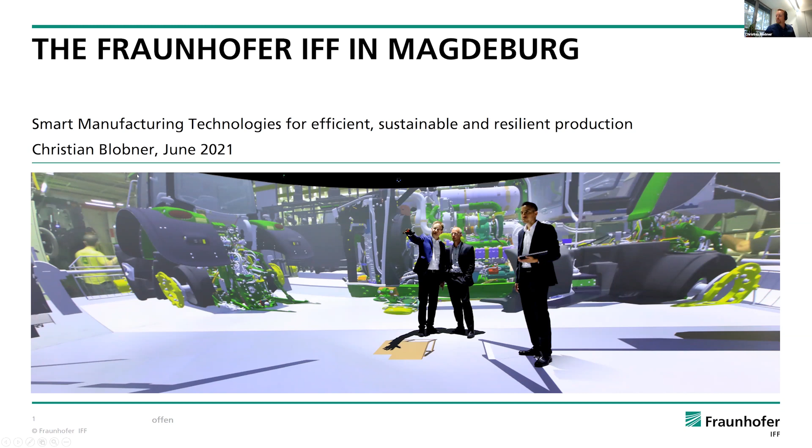And show you how research is performed in the city of Magdeburg, how research players interact and collaborate. So let's get directly into the presentation. Just to give you an impression of how we are situated here, we actually have two full research buildings in Magdeburg, which are pretty close to the University of Magdeburg. So there's also a very close cooperation between the research players here in Magdeburg.

Fraunhofer is very associated with the university. Our director, Professor Arlinghaus, has a chair for engineering at the university. And also we recruit our staff, our student assistants, from the university, so that there's a good collaboration between the basic research that happens at the university and the applied research for which Fraunhofer stands.

In our two research buildings, we have more than 4,000 square meters of laboratory space. We also have shared laboratory space with the university here in Magdeburg, but also with the University of Applied Sciences. So also staff from our side have different professorships at the university and the University of Applied Science here in Magdeburg. All in all, we are a very interdisciplinary bunch of researchers, with approximately 190 researchers here in Magdeburg, plus student assistants, plus collaborative partners.

And we work with an annual budget of about 20 to 21 million euros research budget, of which one third, according to the Fraunhofer model, comes directly from cooperating with companies, doing applied research to the benefit of the company, working on the competitive edge of companies to promote especially digitalization and automation within the region of Saxony-Anhalt, within Magdeburg.

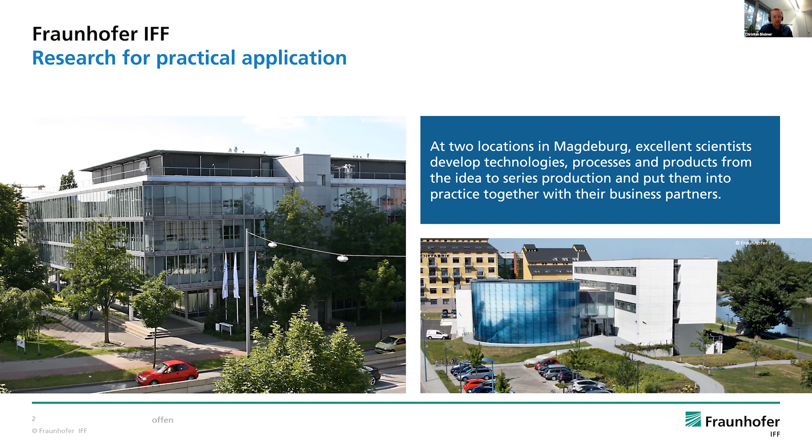Then from a technology point of view, we work very heavily in technologies around measurement and testing technologies and digital assistance, meaning how can we use optical measurement technologies to improve process quality, but also product quality, and use the data that we collect through these different methodologies and provide value-added data through digital assistance systems to the workers, to the operators within the system or within the factory.

The second more technical area is robotics and autonomous systems. Here we have a very strong focus on topics around human-robot collaboration, but also service robotics, and basically try to work on these topics on how there can be shared workspaces between robots and humans in the factory.

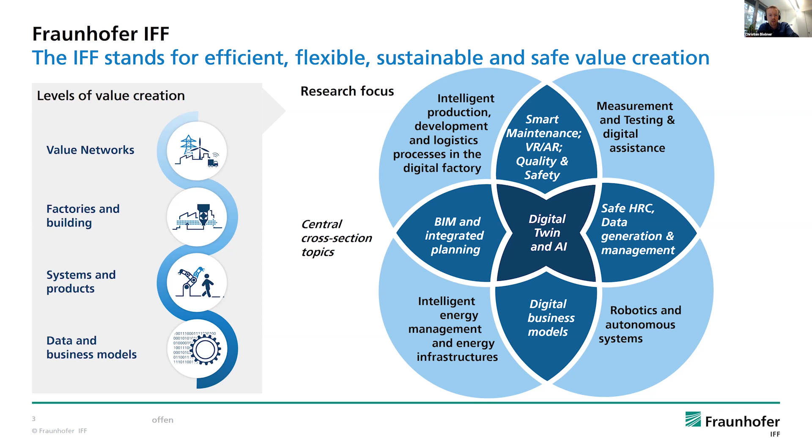I just want to give you a short overview of a selection of projects.

Obviously, we have multiple projects running through the year, funded through research funding projects from government agencies or the European Commission, but we also work on company projects, multiple company projects, and what you can see here is just a selection of those.

First, I want to give you an impression of how we use the digital twin of a machine, meaning the digital representation of this production system, and enhance it with the data that we can collect in real operation, and provide the worker, the operator of the system, with value-added information.

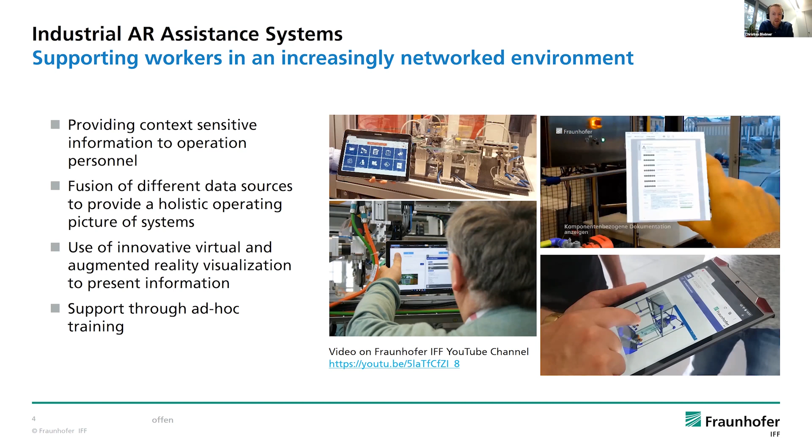Another project which I wanted to show you is again the combination of VR and IoT, but here on a much larger scale. And this is also a very nice example of how we cooperate with partners here in the region, because we have a very good project running, funded by the European Commission, on the digitalization of the port of Magdeburg.

Magdeburg has the largest inland port in central Germany, and we help them through the combination of IoT technology on the ground and VR models, and their combination, to optimize the processes in the port and increase the overall efficiency of logistics services and logistics processes in the port. Magdeburg and the region around it is a very important logistics hub in Germany, and cooperation with the logistics industry is a very important aspect of the work that we perform here at Fraunhofer IFF.

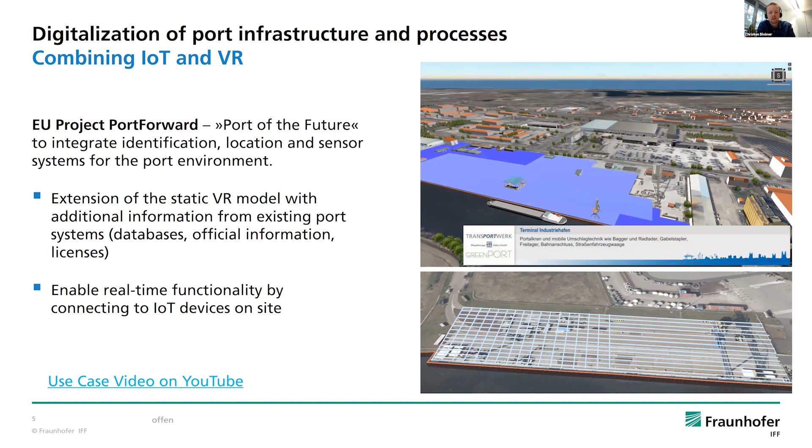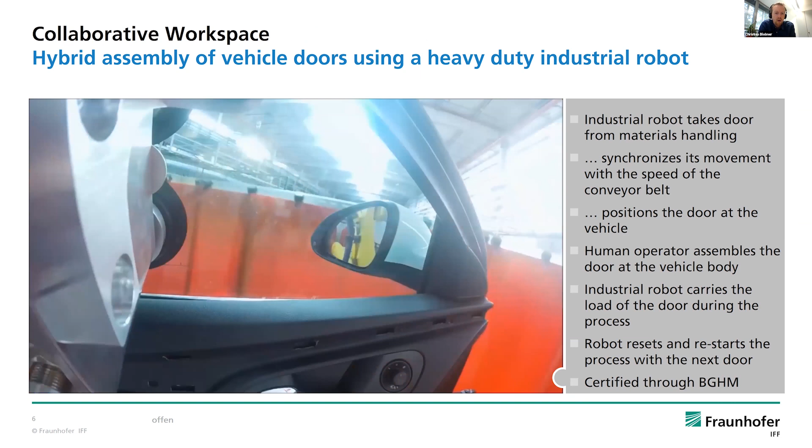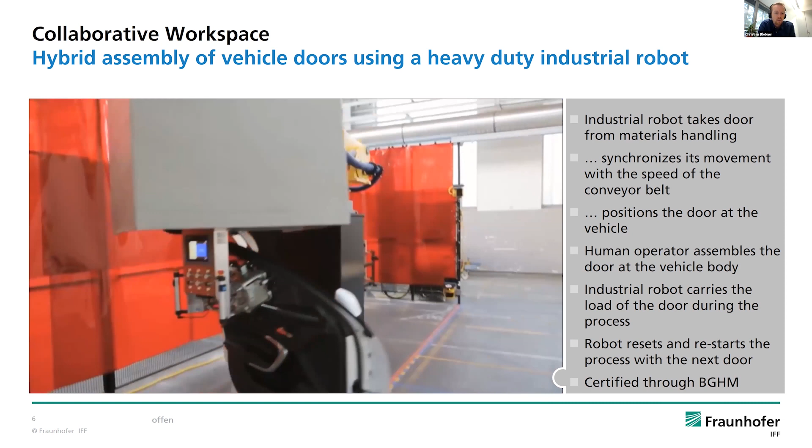But obviously, we also work with manufacturing companies. Here's an example where we work together with one of the big OEM companies from the automotive sector, Opel, on designing a shared human-robot workspace, where a big industrial robot is used to position, for example, doors in the manufacturing assembly process.

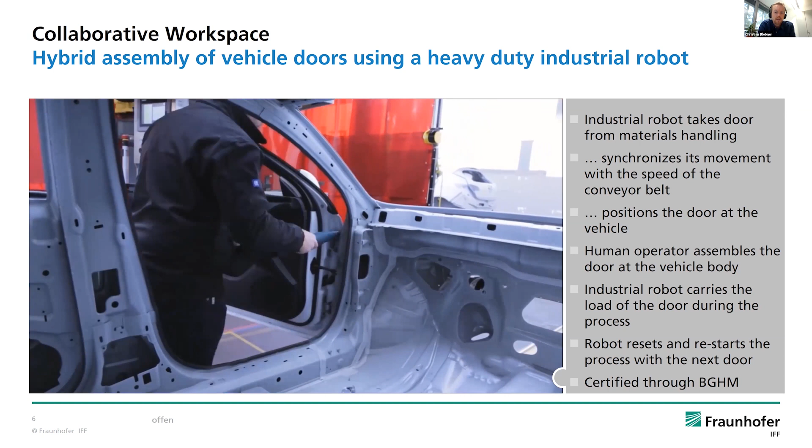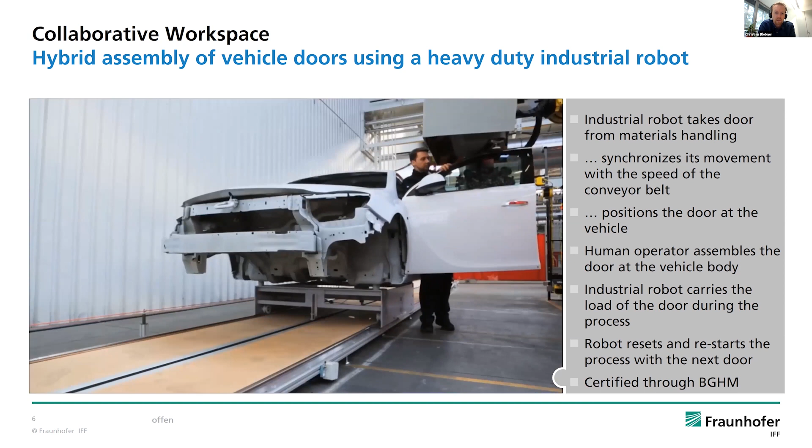Basically, what we always try to do is support the human operator and bring in automation solutions, robotic solutions, where robotics can actually add value to the assembly process, for example. A robot will not be able to automatically perform this work because it's too fiddly and maybe too individual, so you always need a human in the loop in this process, but the robot obviously can do the heavy lifting.

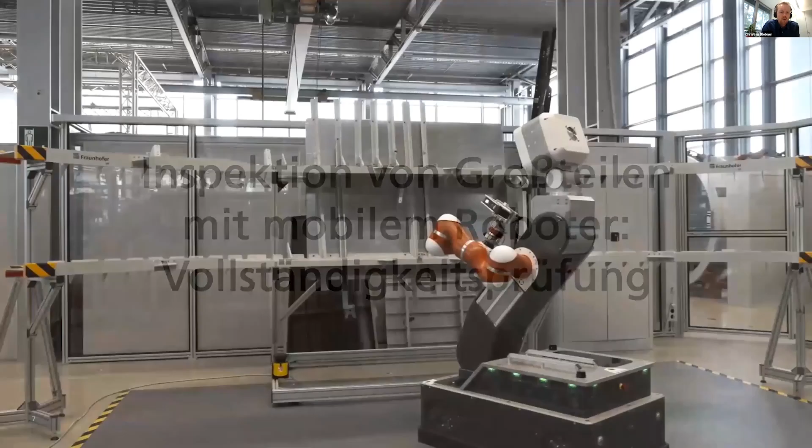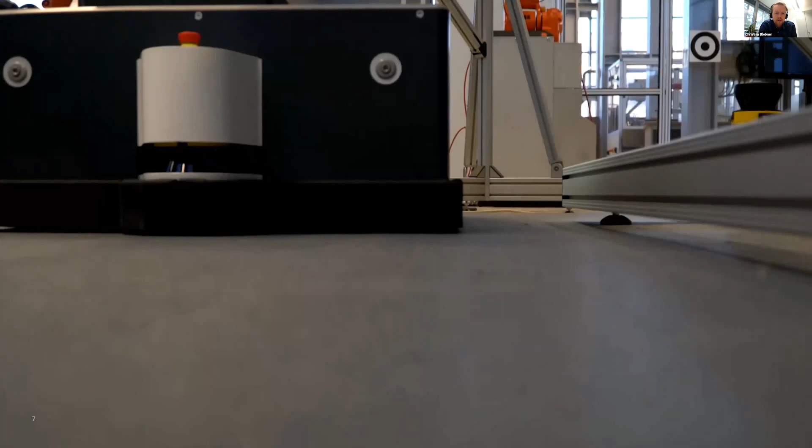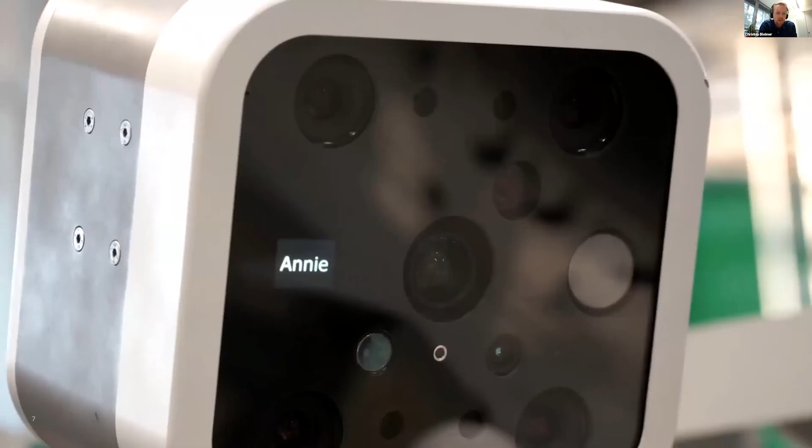Another aspect we are working on is inspection technologies, and here too we combine robotic solutions with humans in the loop. We have an example from the aeronautics industry, where all the parts are different, and we have to have an adaptable process where the measurement of quality issues needs to be adaptable and flexible. We have robotic platforms, like mobile robot platforms, that can work on these aspects.

Coming to an end, I also want to give the short impression that Fraunhofer is part of a big family. All in all, there are more than 72 different Fraunhofer research institutes all over Germany, and the Fraunhofer IFF in Magdeburg is one of those institutes. We can also fall back on this large network and cover, through this network, other topics which might be relevant to companies.